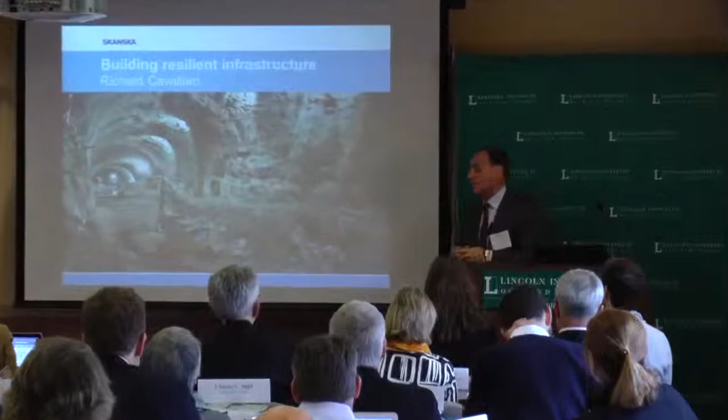I'm Rich Cavallaro. I am the president and CEO of Skanska USA Civil. I'm responsible for the civil infrastructure business and mechanical power business here in the U.S.

Here's a great example. If you had Manhattan and put a 30-foot concrete wall around the entire island, and we had another event like Superstorm Sandy, we would avert a disaster in Manhattan. Unfortunately, that water goes somewhere. We would bury Queens, Long Island, New Jersey. So it's not practical to actually do that.

So the real question is, what is resiliency then? Resiliency to me is to manage the event in a way that creates the least amount of damage possible, and then find a way to get back in service as quick as possible. You need to do that in incremental ways, and we'll talk a little further about that.

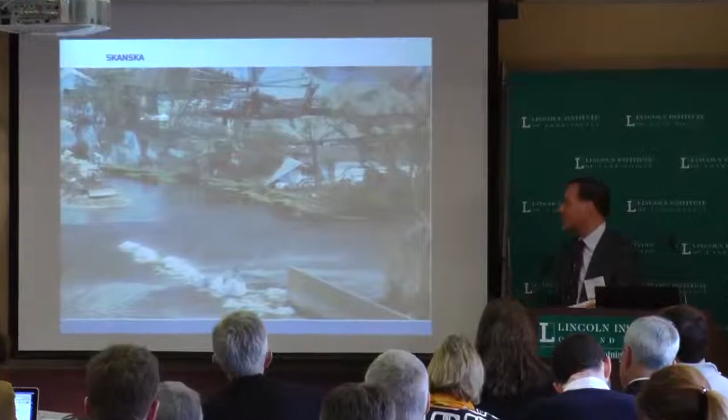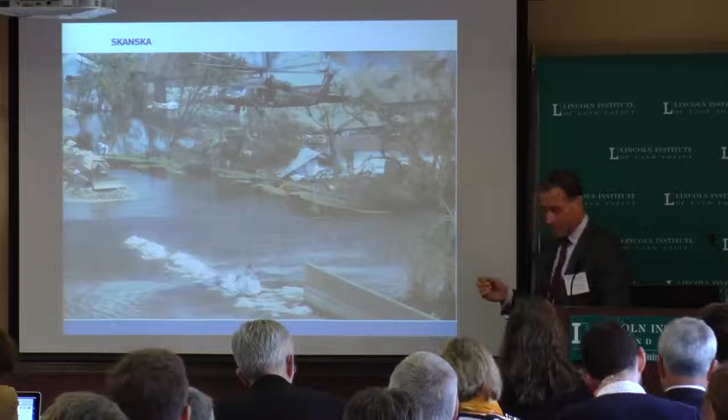So just talk about some of these. This was Katrina, right? What did Katrina cost? Katrina cost us $170 billion in disaster relief. We're really good at relief. We're really bad at avoidance. On top of that, 2,000 people passed away. I don't think we talk enough about that. What's the value of life?

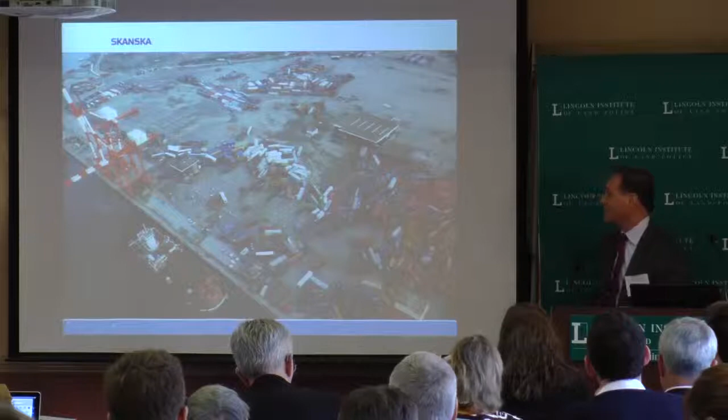This is the tsunami in Japan in 2011. This cost $300 billion. This is 40-foot cargo containers thrown around like Legos. And again, 16,000 people passed away as part of that.

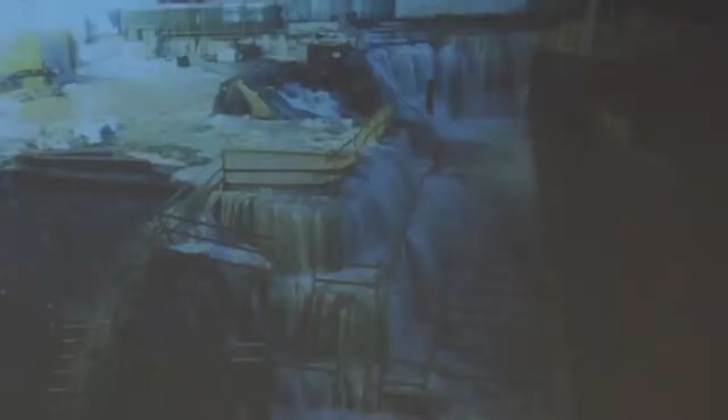And this one is near and dear to my heart. I'm a New Yorker, based in New York. This happens to be the open trench to Ground Zero World Trade Center. This is the water during Sandy that came up over West Street and just poured into the basement. We had 165 million gallons of water in the basement of the new World Trade Center. Interestingly enough, it sounds like a horrible thing, and I'll tell you why it wasn't, but not yet.

We went back to gas lines. Some of you are as old as I am in this room and remember the gas lines of the 70s. You'd wait 3 and 4 hours. Why? Because gas stations had no power to get the fuel out of their tanks, and we couldn't get fuel to New York. There were logistical reasons for that which really ended up making no sense. If you lived in Connecticut, you could get fuel like that. Well, how could that be? It's an easy drive. So those are some of the challenges you have during a storm that is so local.

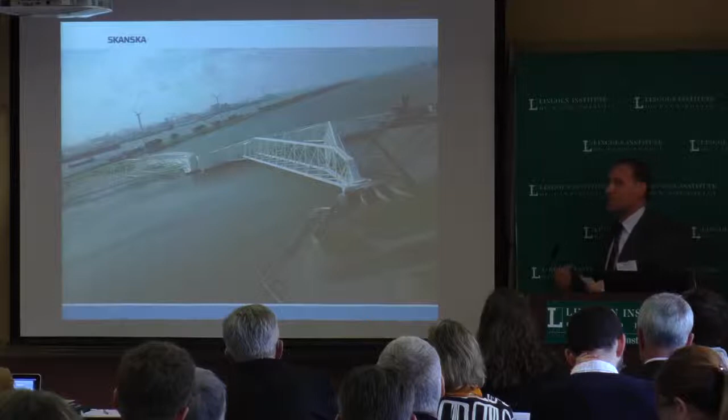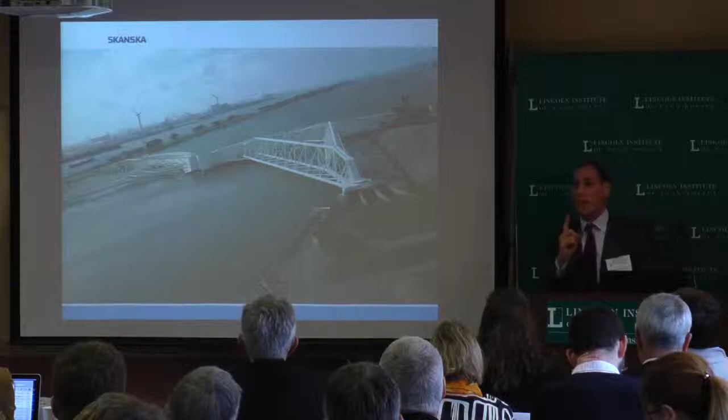So these are some of the big solutions that, quite honestly, we can't afford. This is in Rotterdam. This is a sea gate that protects the city. This thing is twice as high, twice as long as the Eiffel Tower is high. It has operated once, in 2007, and cost $620 million back in 1990. Can we really afford that?

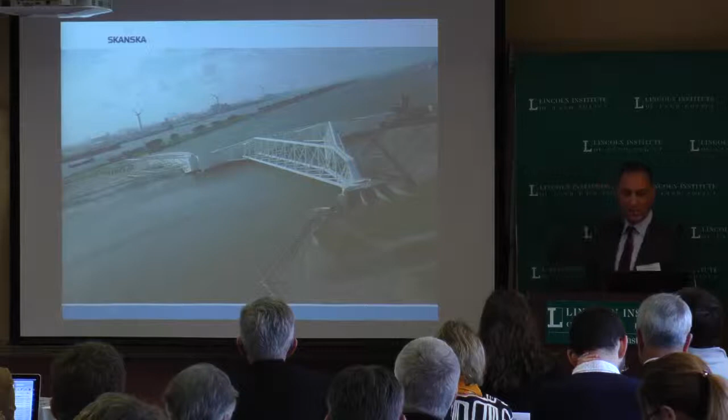Again, we can't keep good state of repair on much of our infrastructure. This is an artist rendering. This is the Verrazano Bridge in New York. This is again a tide gate upstream.

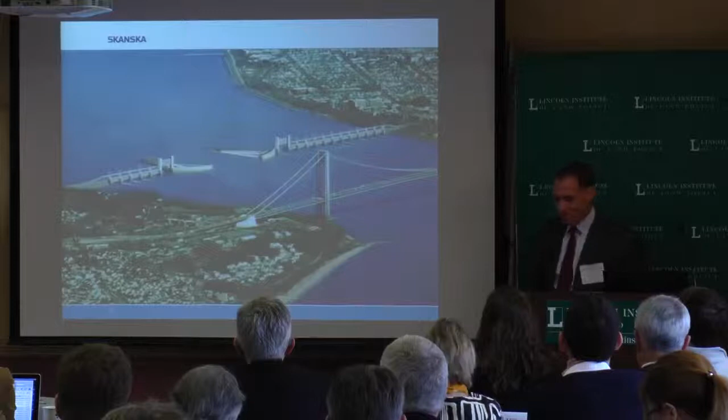They estimate that at $6.5 billion. We're building a new Tappan Zee Bridge for $4 billion. Could we really afford that tide gate to sit there and be used once every few years or once every 10 years? Of course we can't. So we have to find incremental solutions or incremental costs that give us big benefit. This is the Midtown Tunnel, or the Elizabeth River crossing in Virginia.

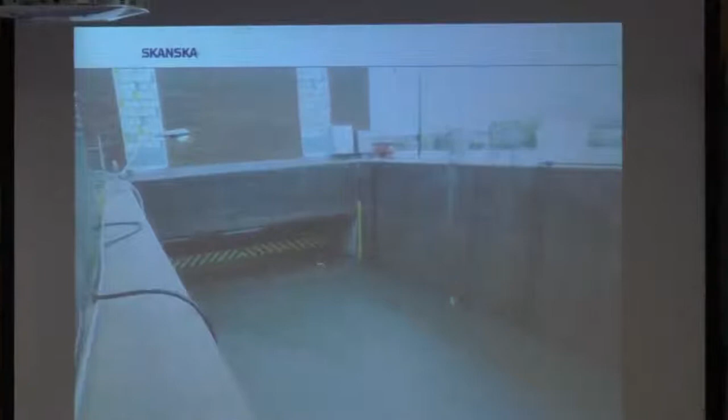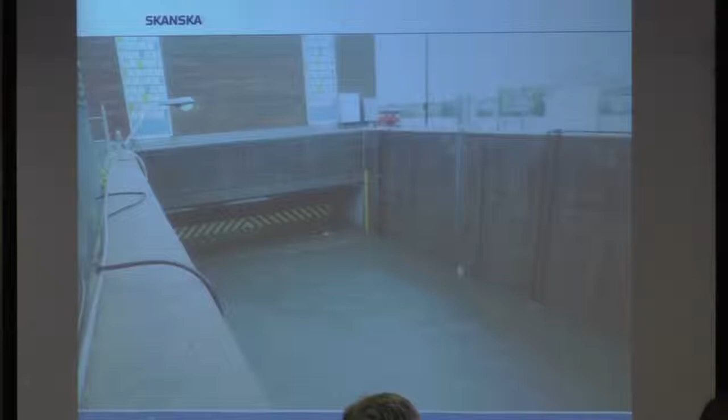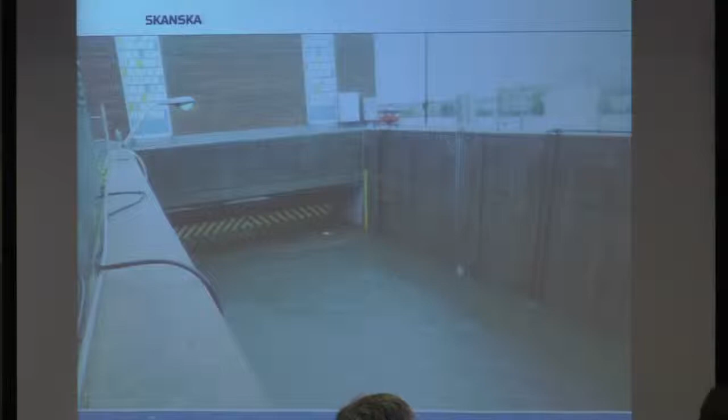It's between Portsmouth and Norfolk. We now operate this tunnel. This is the entrance. This tunnel had a tide gate put in many years ago, an 80-ton tide gate. So basically all you're seeing here is the gate comes down, seals the tunnel, the entrance fills up with water, event is over, get a few pumps, and in half a day this tunnel's back in service. That's what I'm talking about when we talk about incremental costs. The cost of that tide gate was almost nothing compared to the cost of building that tunnel. Those are the kind of things we need to focus on.

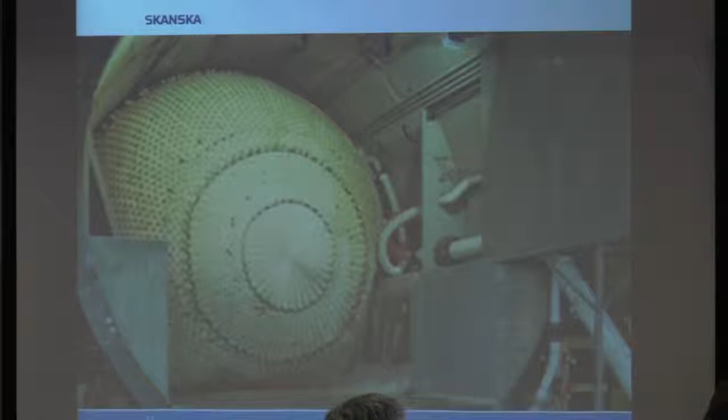This is one that's being tested. Essentially, it's a big airbag. In existing tunnels, they're looking for a solution for tunnels that do not have tide gates. Essentially, it's a big airbag that seals the tunnel during an event. Again, fairly inexpensive. There's another solution.

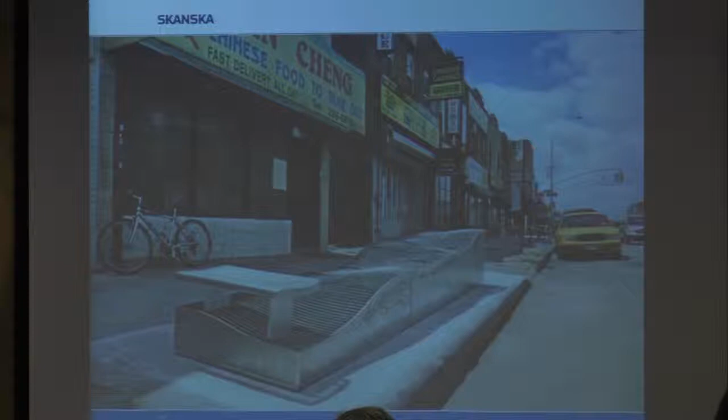So this is another subway system. Why walk up to go down? Because that's what this does. But again, it's the same concept: you give yourself a few more feet of water height before you actually get water into the system. And these are all relatively small investments compared to some of the significant investments I talked about before.

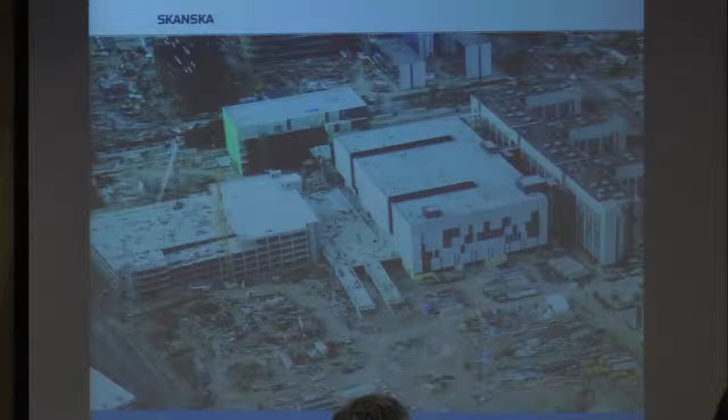This was a huge ripple effect that we lived through. So much of our electrical infrastructure is in the air, unfortunately, so we have to address this. Not having power for three weeks is almost unheard of, but that's what happened.

I know it's unlikely or unreasonable to think we can go out there and start burying everything we own, because we can't. But we need to get started. We need to at least have a plan to do a piece every year, and over time we'll get this stuff hardened and underground. I can tell you PSE&G in New Jersey has started a $3.9 billion program to do this, to raise their substations to higher ground and get their wires below ground, quite the opposite.

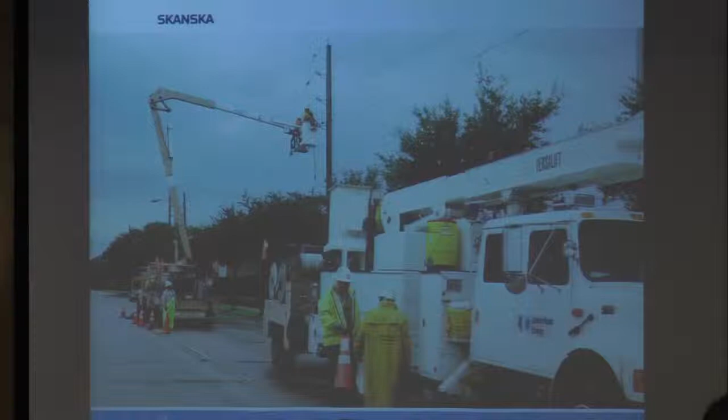Unfortunately, so many of our power plants sit right along bodies of water because a lot of them were coal plants. You needed to get the coal there by barge, so that's where they are. Again, this needs to be addressed. A lot of our plants were taken out as the water rose. It's a more difficult problem, but as we replace the plants, we need to be cognizant of being able to be resilient and operate.

This is the Crossrail system in the UK, and these guys really thought it out. They engineered into their system and into the new piece of the system things like tide gates, elevated entrances, elevated tracks, watertight doors in the system, all to be able to handle an event like that.

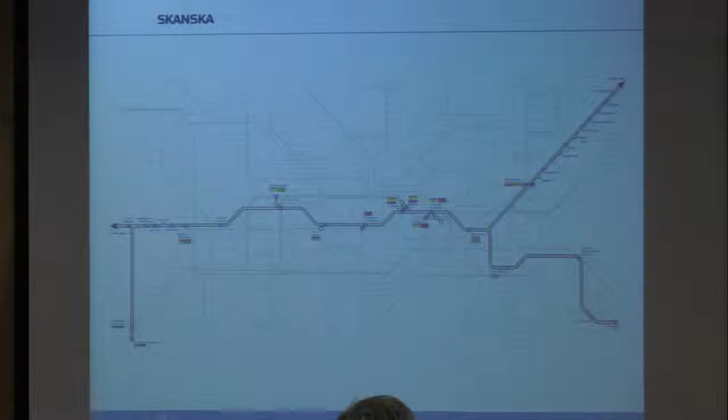And I love this approach. This is actually in Rotterdam. Basically, it's a parking garage. But what they use it for is when they know an event is coming, they clear the cars out. They basically funnel the water to this garage and let it fill up with water. What it becomes is a sump or a holding cell, so whatever water goes in here doesn't go somewhere else and create damage. It's a concrete structure, there's not a whole lot in there, so you're going to do very little damage to this structure, if any at all. You'd be prepared to pump it out pretty quickly when the event is over, and that becomes resilient infrastructure.

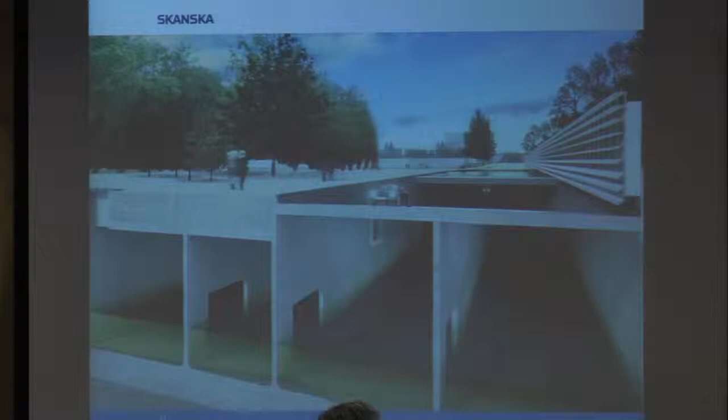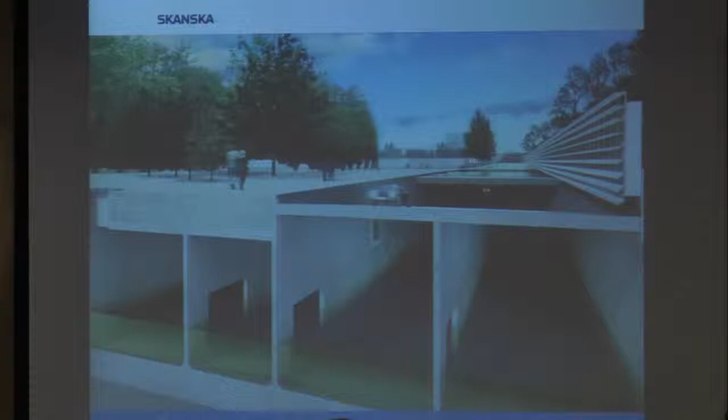And as I mentioned before with the World Trade Center, although it wasn't the intended purpose, that open excavation took so much water that so many buildings were saved that didn't get water. When 165 million gallons went down into that basement, it didn't take the next building out and do real damage. So it's the same kind of concept. Obviously, we didn't want that to happen to the Trade Center, but this is the perfect idea of resilient infrastructure, and it doesn't cost a lot of money to do this. In fact, another one of these is being planned in Washington, D.C., somewhere near the National Mall.

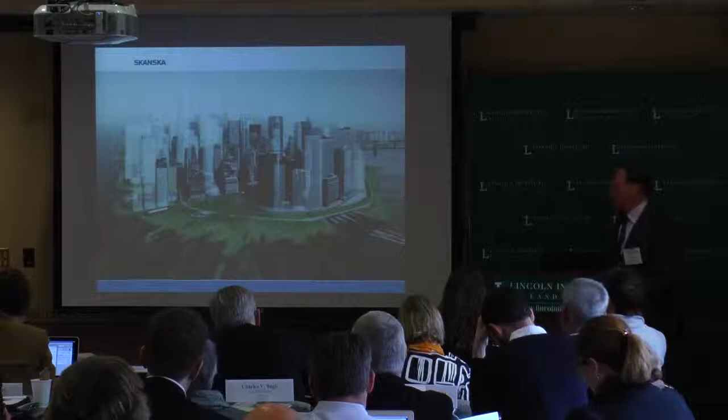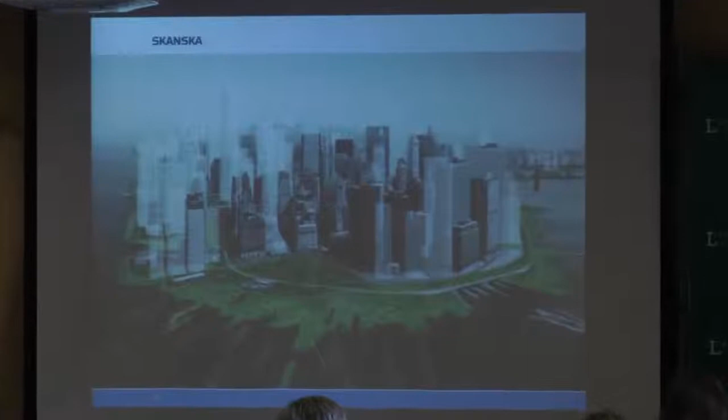I think this is important too. This is basically creating natural infrastructure, or artificial barrier islands. We all could use more green, so Manhattan could use a little more green. But creating these islands out into the harbor reduces the fierceness of the storms, knocks down the waves. There are ways they can be molded and shaped to do those things. Again, not a huge investment, but that would minimize the impact to the city in an event.

This is a good news story. I have to say the MTA in New York during Sandy did a very, very good job, and again, this is just planning. They knew the event was coming, they took all their equipment to high ground, and they did not lose one train. They went into their system and removed all their signal equipment, which is electrically sensitive, from wherever they thought it would be impacted by water. The water came in, there was no stopping it, it receded, they pumped out, reinstalled the electrical signal equipment, and the trains were ready to go. In fact, they were ready to go before Con Ed could even give them power. That's just good planning. They did a very, very good job.

The other thing that happened during Sandy, I would say we could do a better job in this, and it's one of the lessons learned. We happened to be working for the Port Authority at the World Trade Center site. So when the basement filled with water, they needed pumps to get it dry. We're a national, even global, contractor, so we can reach out. We brought pumps for any kind of event like this, but resources are scarce, you can't find pumps anywhere close. They needed to be gas pumps, they couldn't be electric since there was no power, so we went all over the country. We brought pumps in and got that basement dewatered in less than a week. But the question you had to ask yourself was, was that really the right use of those resources? Was there some other facility that should have gotten those pumps before we pumped out the basement?

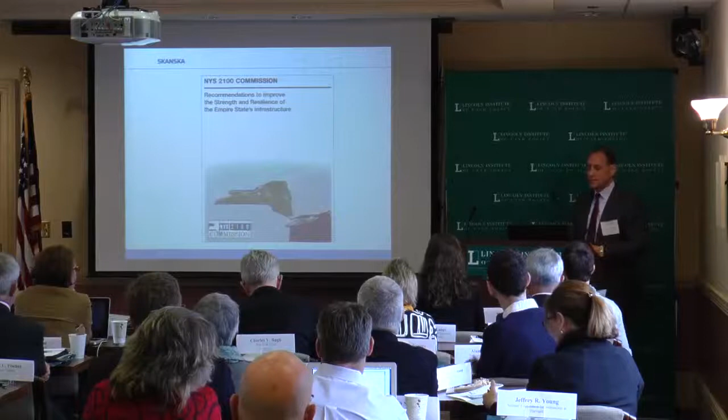Governor Cuomo commissioned the 2100 Commission essentially to look at some solutions for the future in terms of resiliency. Some of the things they suggest are good ideas, but it takes some courage.

One idea is, should there be shared pools of hard-to-procure equipment? It could be shared between several agencies, or between several cities. There's no reason several cities couldn't put this equipment in a particular place, and God forbid an event comes, you can go get it. But the issue is, that makes the most sense because it gets used so infrequently, so to make a big investment and let it sit there and collect dust is hard to do.

Always focusing on the fact we don't have enough money to pay for what we need right now, but this needs to get addressed. We can't ignore it, because if you just look at the few storms that I talked about, it was over $500 billion in disaster relief. Could we have invested half of that up front and not seen that back-end number? Probably.

Again, this is talked about institutional cooperation, as I just talked about. So there's no money, and many of us may have lived through Sandy or some other major natural disaster. Resolve fades. When designers put forth a design that takes some of this stuff into consideration, it's too expensive, so the first thing they do is cut redundancy and resiliency. It's the first thing that comes out of a design.

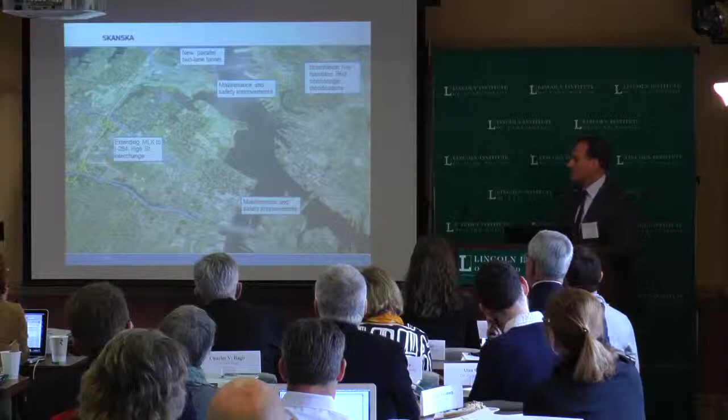One of the answers actually is P3. And why P3? Because right now we are the concessionaire and contractor design-builder for this Midtown Tunnel project. We took over an existing tunnel, which I showed you the picture of, right after Superstorm Sandy. We're building a new tunnel, and we're rehabbing the existing tunnel.

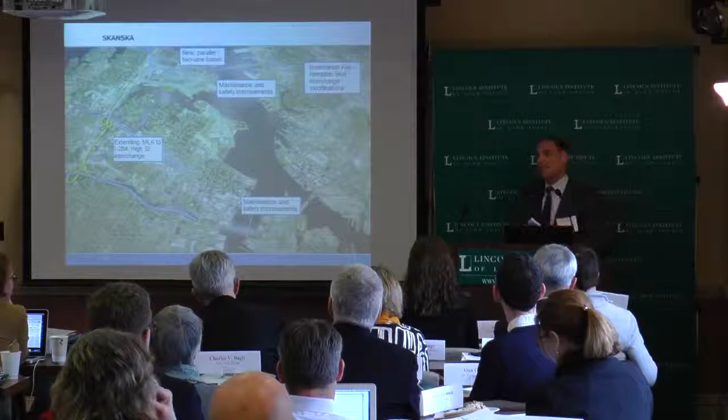When we had to bid this job, we had to design, build, operate, and maintain it. So part of our calculation was not just the cheapest capital cost, we needed the cheapest overall cost, because we were basically saying we're going to maintain this thing for 58 years. So we spent more money up front in the capital cost because we believed it was going to give us a cheaper operation and maintenance cost.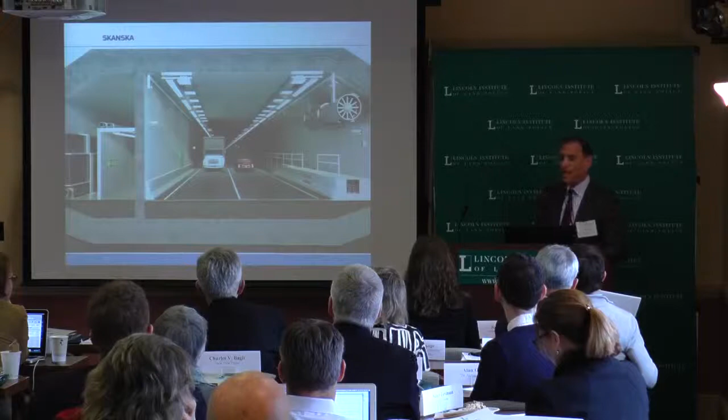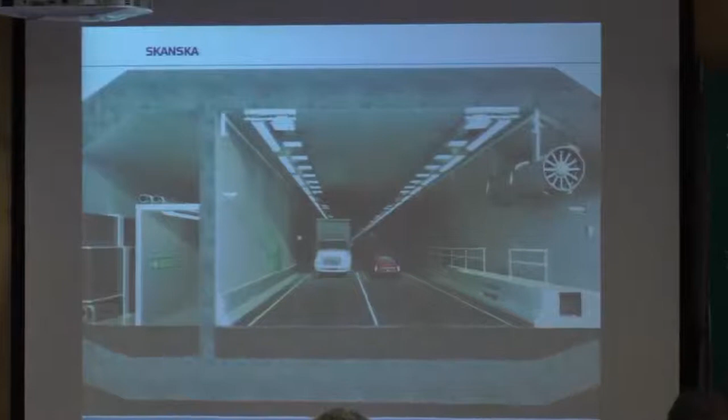Just some of the things we did - when you look at the entire project cost of $2.1 billion, the money we spent to make this system resilient was fairly insignificant, I mean, 5% or so.

Just some of the things we did: the design life of the concrete, instead of 100 years, we made it 125, which makes the concrete very dense, so it holds water back. We designed it instead of the typical 100-year flood for a 500-year flood, because this tunnel is in one of the wettest places, I think the wettest place east of the Mississippi.

The approaches, we spent more money to make sure we made them taller, so we could buy some more water height before we actually infiltrated the tunnel. Of course, we put tide gates in and watertight doors, and we improved the drainage.

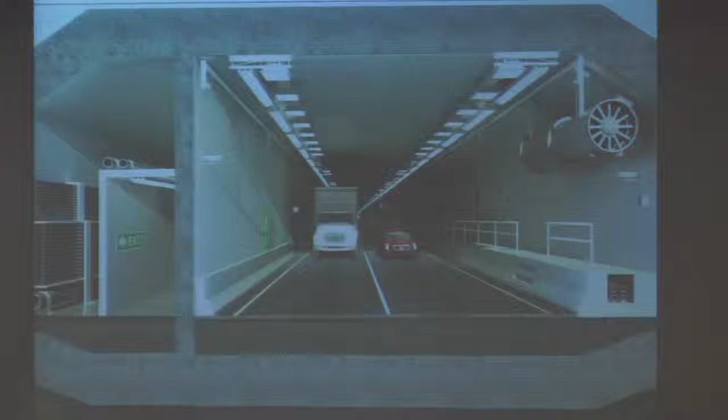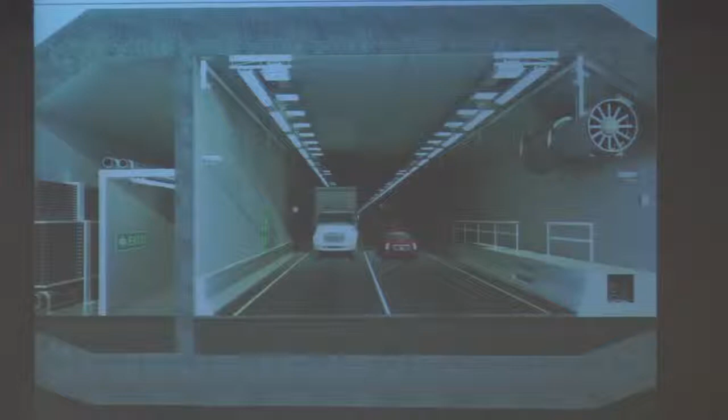Again, all those things were fairly minimal in cost to build this tunnel, but at the end of the day, if we're not putting cars through that tunnel, we're not collecting revenue, and we're not recouping our investment. So it made sense for us, dollar for dollar. I'm not sure that's getting done on the public side.

So, just to wrap up, the reality is there's not enough money to go around. We have to find ways to be smarter. We can be smarter by making incremental investments instead of exponential investments in the infrastructure. We can do a better job of managing the storm before it comes, a better job after it comes, and we can plan our cities in a way that we can channel these events, in most cases water, into places that minimize the damage to facilities. Thank you.